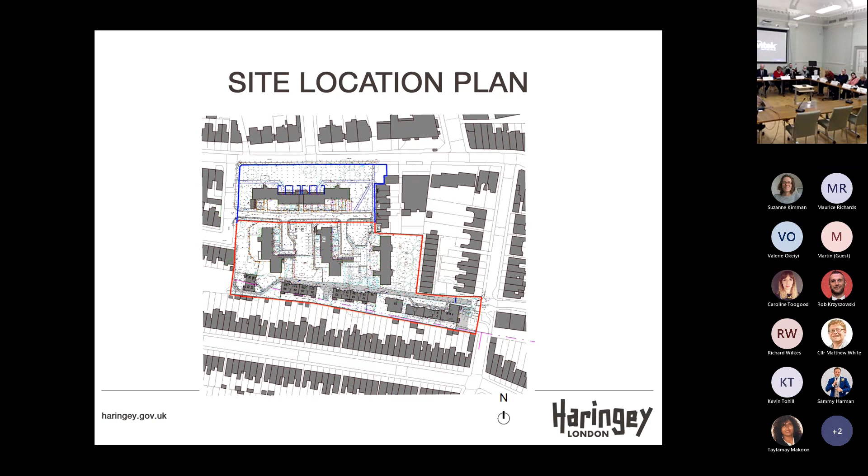This is a bird's eye view of the site. The properties formerly on Brunel Walk to the south of the site, highlighted in red, have been demolished and will be replaced by new housing.

The Turner Avenue estate to the north of Brunel Walk is set amongst landscape, communal amenity, private gardens, play space, and 2 parking courtyards. The 3 existing buildings on the Turner Avenue estate, indicated by the red line, will be retained. However, alterations to the open areas between the buildings are proposed, including improvements to access, landscape, and parking layouts. Landscape improvements are also proposed to the remaining part of the Turner Avenue estate, indicated by the blue line, but access routes will remain unchanged in this area.

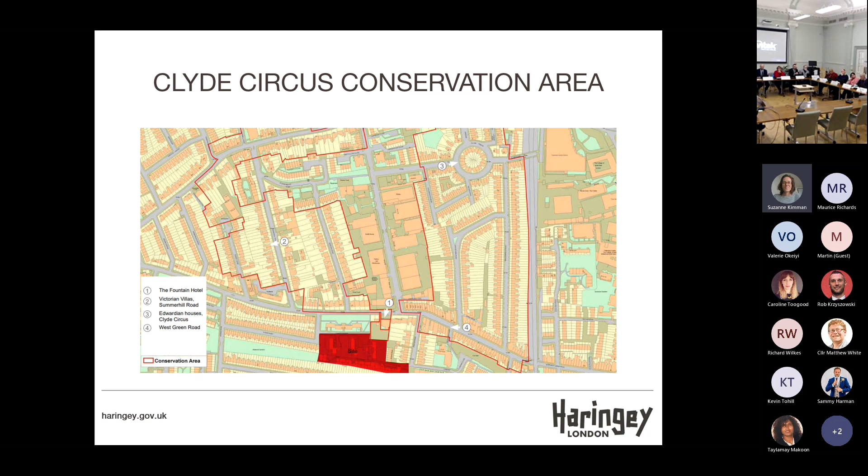The site is close to, but not within, the conservation area. The nearest conservation area is Clyde Circus, located to the north of the site, which is indicated by the red line.

The site falls within site allocation SS3, Brunel Walk and Turner Avenue, of the Tottenham Area Action Plan, which allocates the site for a potential master planned housing estate renewal opportunity to improve the quality and utility of the housing stock on the site.

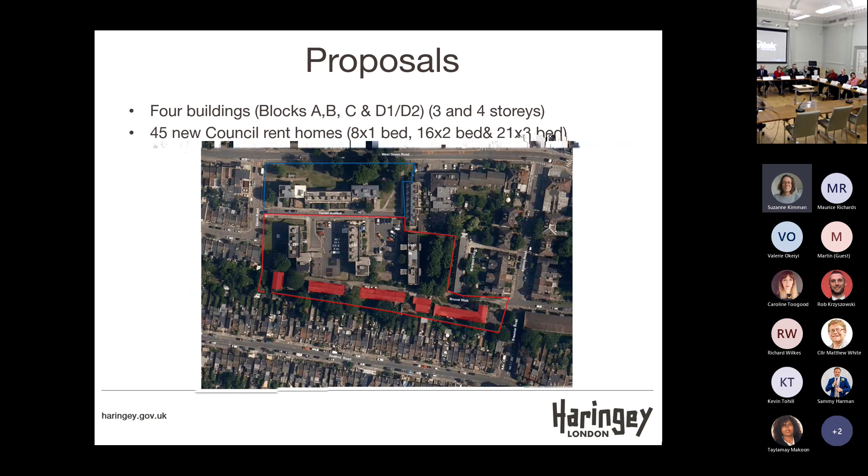The proposal includes 4 buildings, blocks A, B, C, D1, D2, 3 and 4 stories in height. 45 new council rent homes are proposed, comprising 8 1-bed, 16 2-bed, and 21 3-bed flats. The layouts of the existing parking areas are rationalised.

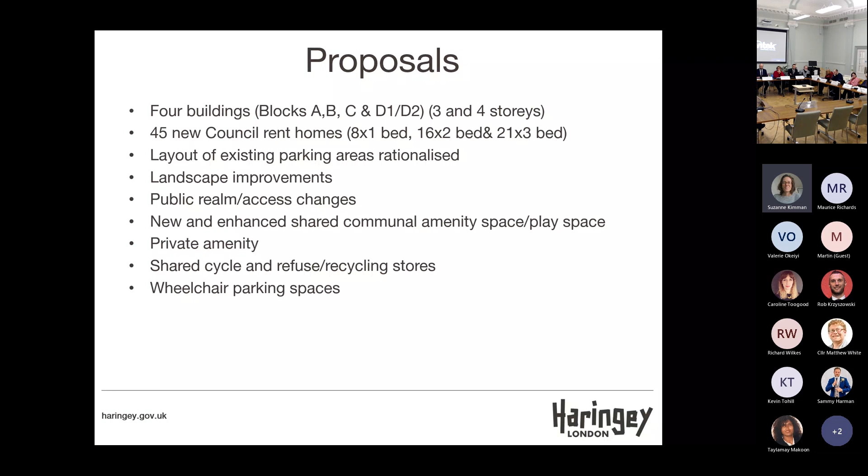The proposal includes improved landscaping, public realms and access changes, new and enhanced shared communal amenity space including play space, private amenity space, shared cycle and refuse recycling stores, and wheelchair parking spaces are also proposed.

The considerations include principle of the development, quality of accommodation, quality design, scale, setting of the conservation area, landscaping, impact on amenity, transport and sustainability. I will now focus on one of the key issues.

In terms of principle of the development, whilst the proposal does not include the comprehensive estate renewal envisaged by the site allocation, the key principle of the site allocation would be delivered through replacement of the former temporary accommodation on Brunel Walk and the proposed master plan approach to the Turner Avenue estate, which includes significant improvements in communal, parking and landscape areas. The site is being developed for council housing, which forms part of its 2018 commitment to deliver new affordable homes for rent.

The proposal at Brunel Walk will make a valuable contribution to the council's housing supply. The proposal seeks to provide 100% of the housing for general needs, low-cost rented homes, and contributes to a mixed and balanced community.

It will make a significant contribution to the delivery of the borough-wide affordable housing target, including the provision of 21 family homes, and land at Brunel Walk is a brownfield location close to sustainable transport connections in an established residential area.

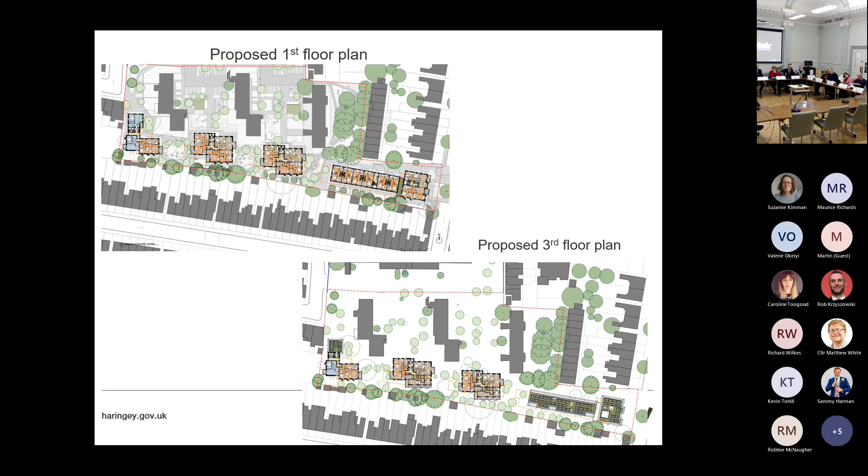Communal gardens are also proposed between the new buildings of the Brunel Walk development. A total of 65 trees will be retained and 68 new semi-mature trees will be planted.

The crowns of the trees within the existing green space to the north of block D2 will be raised to reactivate this space for amenity use. Note that each new building has a green roof.

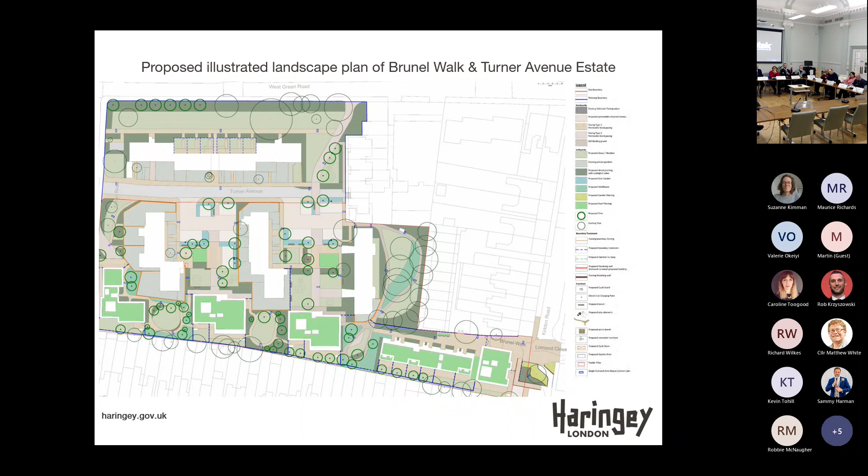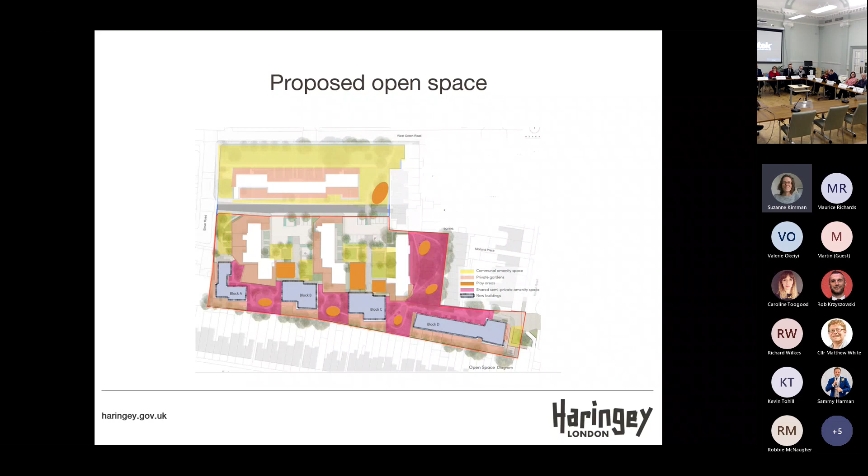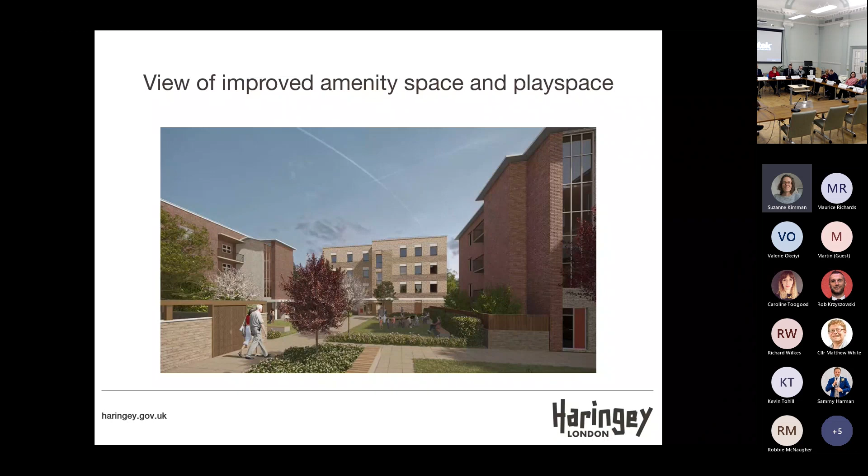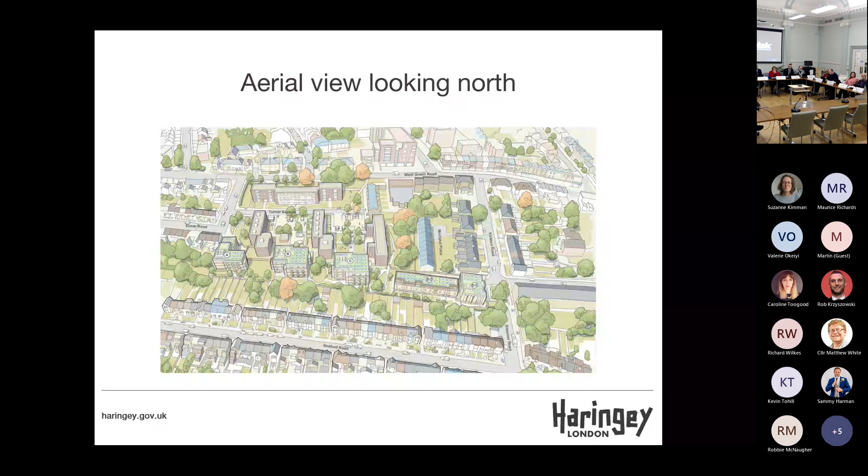This slide shows the proposed front and rear elevation. Note how buildings D1, D2 step down to 3 stories to respond to its immediate context. Buildings A, B and C have been carefully designed to respond to the existing Turner Avenue estate buildings.

The new building will be predominantly based on 2 types of bricks, with reconstituted stone details and brass coloured infill panels. The scheme has been through extensive pre-application discussions with officers, in addition to feedback from local residents and the quality review panel on 2 occasions. Note how the proposed rear elevation shows the outline of the former buildings on Brunel Walk highlighted.

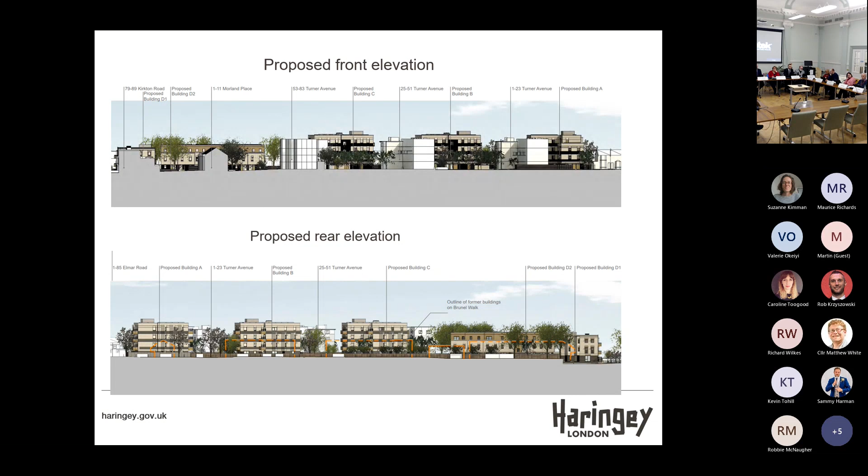This is the closer view of building D1 seen from Kirkton Road. A new active street frontage is created on Kirkton and Braemar Road. The building has more of an individual character separate to the other new buildings. Note how this building reflects the end of the terrace house on Kirkton Road.

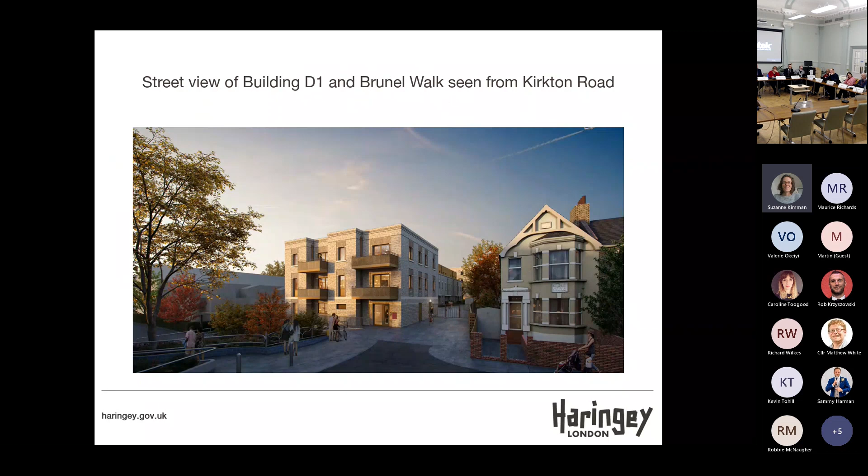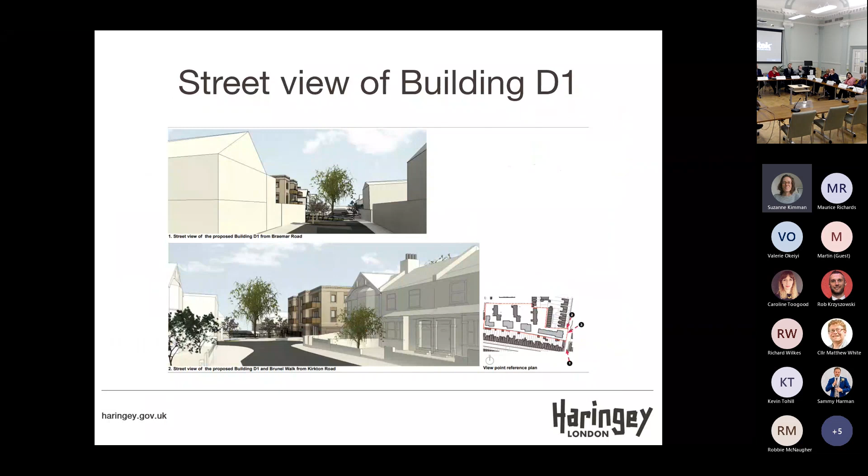This is a street view of building D1 from Braemar Road and Kirkton. This slide shows the north elevation of buildings D1 and D2. Building D2, which contains 6 maisonettes, is the newest building, with flats above.

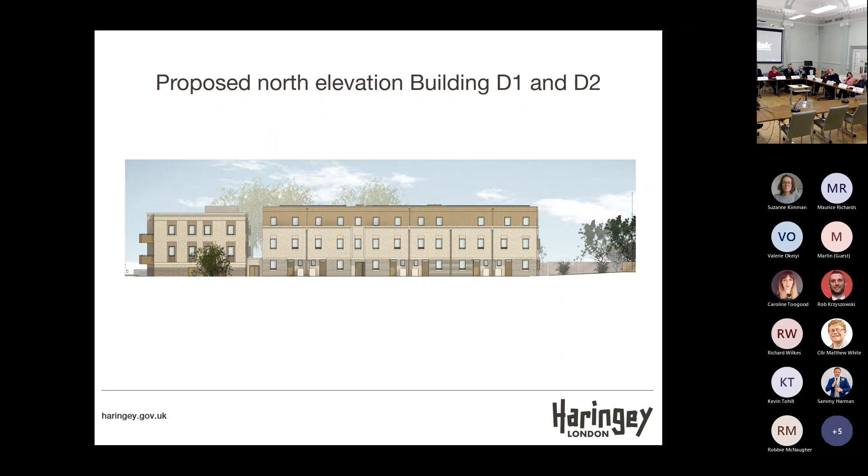This is a closer view of buildings B and C, which are identical. Note how the rear elevations facing south have painted bay windows.

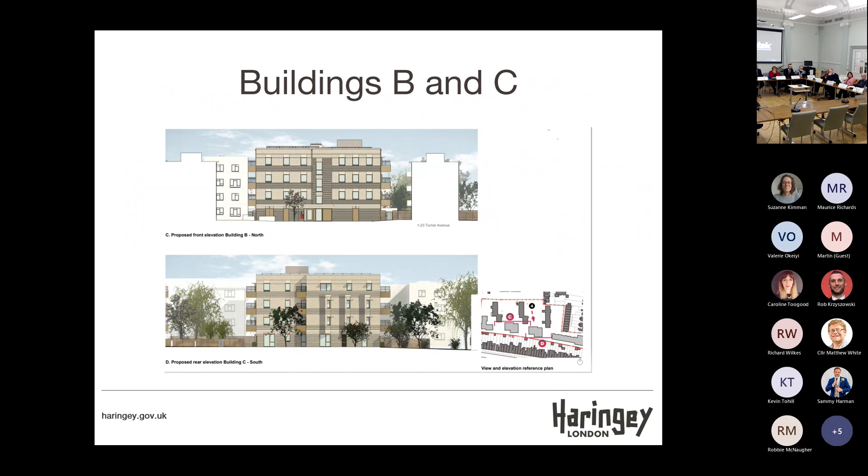This is a closer view of building A, seen from Elmar Road. A new street frontage is created on Elmar Road, and the front elevation of building A closes the corner on Elmar Road between the Victorian terrace houses and residential buildings on Turner Avenue. And the height of this building steps down to 3 stories from the street frontage.

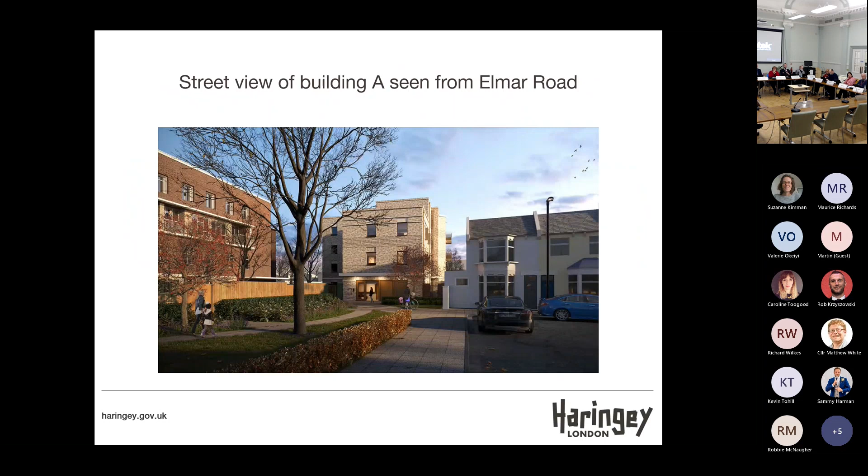Balconies are carefully positioned to face east and west and incorporate privacy screens to avoid direct overlooking of these properties, and bay windows to habitable rooms have been introduced on the rear elevation of the buildings, again to prevent direct overlooking. In addition, new and replaced trees will be planted along the rear boundary to provide some screening and further mitigate the impact on neighbours.

In terms of impact on amenity, there is no significant impact on amenity of nearby residents in regards to loss of outlook or privacy, and no significant detrimental impact on the amenity of nearby residents in regards to daylight and sunlight.

In terms of transport and parking, the site has a PTAL of 3 in Part 6A, which is a good level of accessibility. The scheme is a car-free development due to the site's public transport and accessibility levels. All 29 existing parking spaces will be retained within the parking court areas. The scheme includes 89 cycle parking spaces for the future occupants of the development.

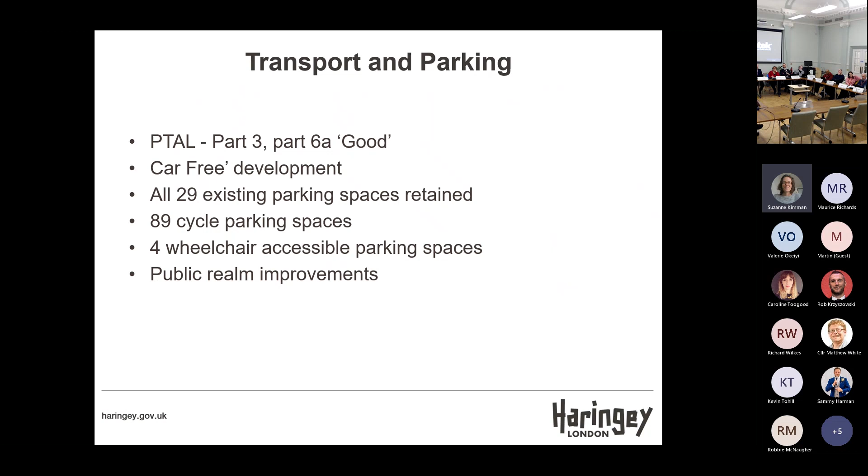This is the section 106 head of terms.

Officers recommend the committee resolves to grant planning permission subject to conditions and planning obligations as set out in the committee report.

Thank you. So, do members have any clarification questions to ask the planning officer, please?

Yeah, in the conditions, it refers to secure by design accreditation and secure by design certification. Can you tell me what the difference is between those two?

Where are you referring to? Page 19, conditions 8 and 9.

Sorry, sir, in terms of that question, the accreditation is at the start of the project, so that shows that we've been designing to meet the standards, and then certification is following a site inspection where the supervisor of secure by design checks that everything is in line with what should be. This is a certificate, so it's a sort of two-step process — signing up to those measures, showing your plans, and then confirming that at the end of the process.

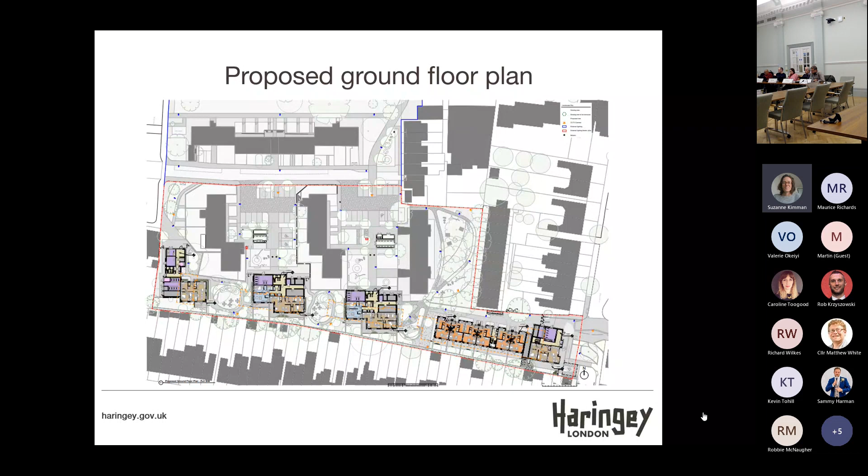Councillor Watson: Thank you, Chair. I was going to ask about this earlier, but in terms of the urban green factor, it's 0.6, which is quite high and quite good. But I want to know how that's split across the red and blue sides of the site, since a lot of the greening seems to be taking place on the blue bit. If we just look at the red bit, where the development is taking place, what would the urban green factor be for that?

The urban green factor is for the red bit. No, sorry, it's for both, combined. So it's not possible to isolate just the figure for the red bit alone.

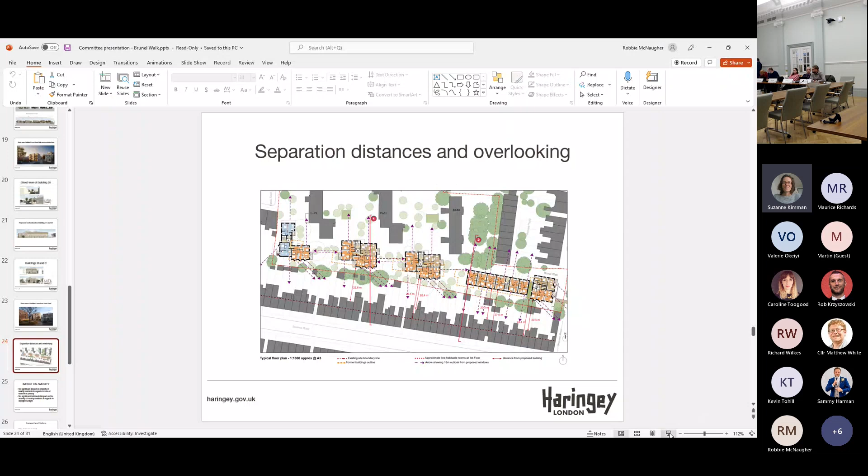Councillor Ross: You mentioned overlooking earlier — if it could go on screen please. So overlooking is dealt with by angled bay windows, introduced on the rear elevation to mitigate overlooking — angled bay windows to the new block, which are the Brunel Walk blocks to the south, and the rear elevation which faces onto the properties on... unfortunately I can't see that. Pretty cool. Anyway, we'll carry on.

If you point out on the street, those arrows show how the windows divert views at an angle away from residents. How far down is that separation? We're looking at between 20 and 27 metres separation distance. The recommended separation is 18 metres.

Is there anyone who hasn't asked a question? I'll bring Councillor Buxton back. Councillor Buxton: Sorry, just following on from that point — excuse my ignorance, but surely angling the windows just means looking into someone else's garden rather than into someone else's window?

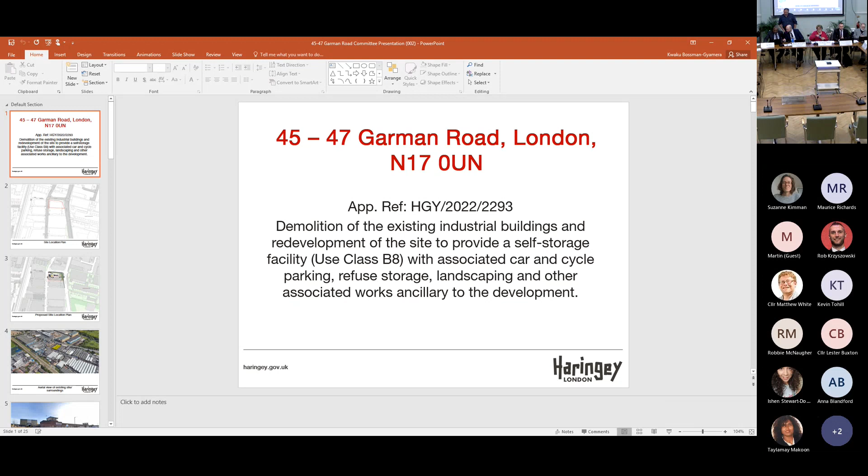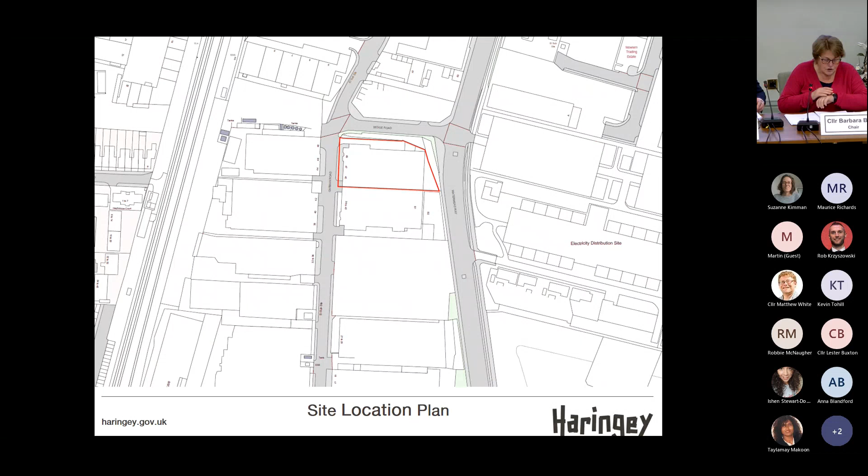Right, thank you. So we'll now move on to 45 to 47 Garman Road, which is set out in pages 149 to 242. The proposal is the redevelopment of the site to provide a self-storage facility, as set out in the pack. The recommendation is to grant, and I will hand over to Kwaku Bosman-Gyamera to introduce the application, please. Thank you, Chair.

The proposal is to demolish the existing industrial building and redevelop the site to provide a self-storage facility within use class B8, with associated car park and cycle parking, refuse storage, landscaping, and other associated works ancillary to the development.

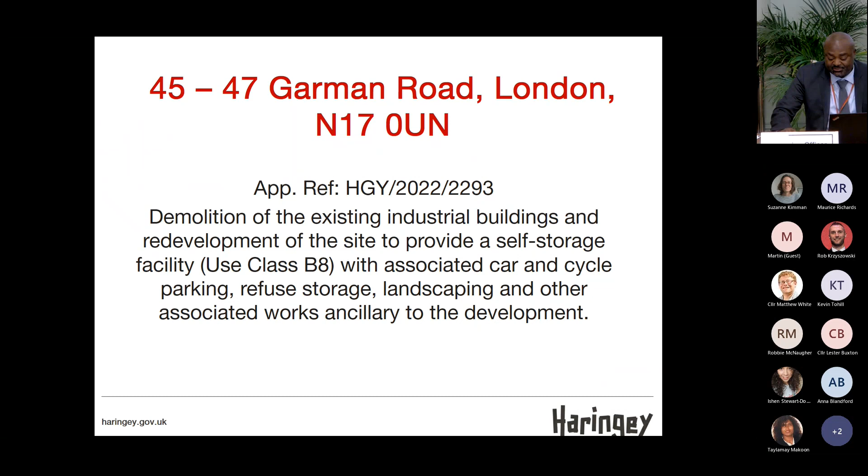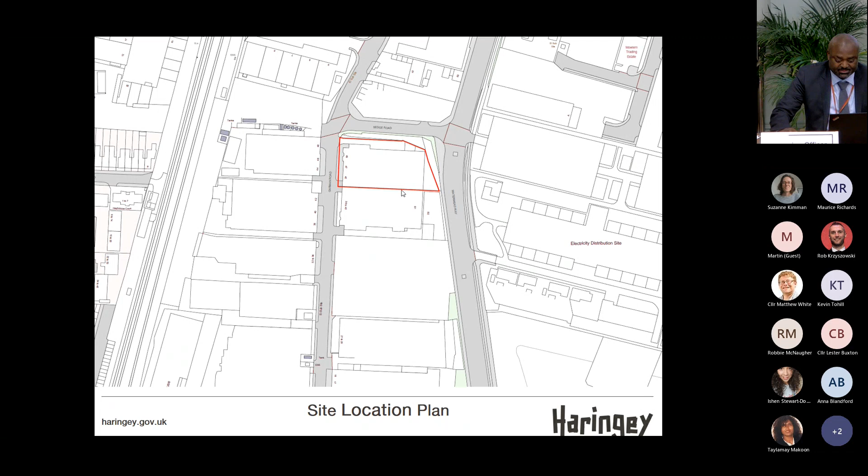The main issues for consideration are the principle of development, design and appearance, impact on amenities of adjoining occupiers, parking and highway, and of course, energy and sustainability.

On the principle of development: the site is identified as strategic industrial land, known as SIL, whose underlying aim is to safeguard the land for a range of industry users within the B classes - your B1, now the E class, B2, and B8, which is storage. The proposed development will maintain business and storage facility use on the site, which falls within B8 use, and as such accords with the objective of the designated industrial land.

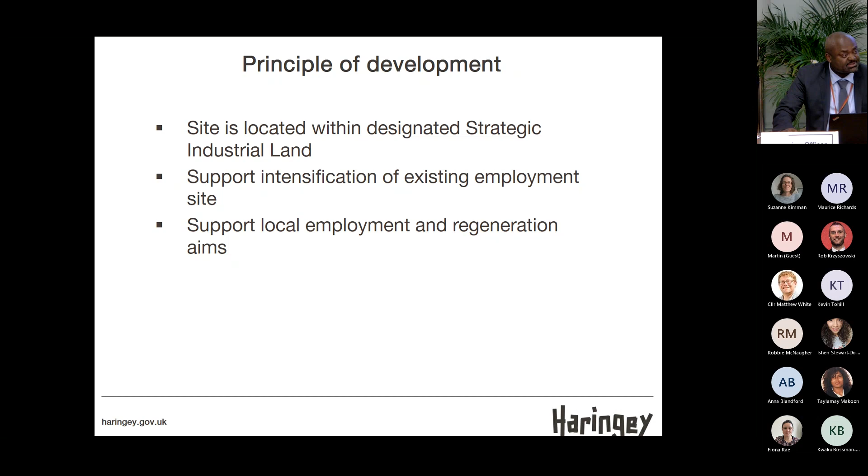The site will also enhance employment use and economic benefits, particularly in terms of providing a more intensive use and securing a modern, viable use of the site. This, I believe, will contribute to the delivery of good quality employment floor space in Haringey.

With regards to design and appearance, the proposal will replace the existing industrial unit, covering the full extent of the footprint with a new modern 3-story building. On the ground floor, the building will have access coming from off Garman Road on the side.

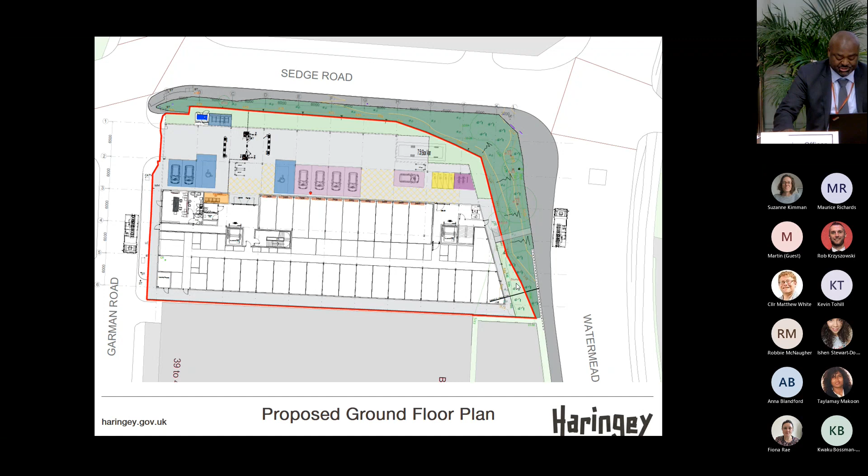On the first floor, the self-storage floors are located on the first and second floor, continuation of the staircase and the lift from the ground upwards.

This is infilled with a demountable mezzanine on the third floor, so this can easily be moved and changed around.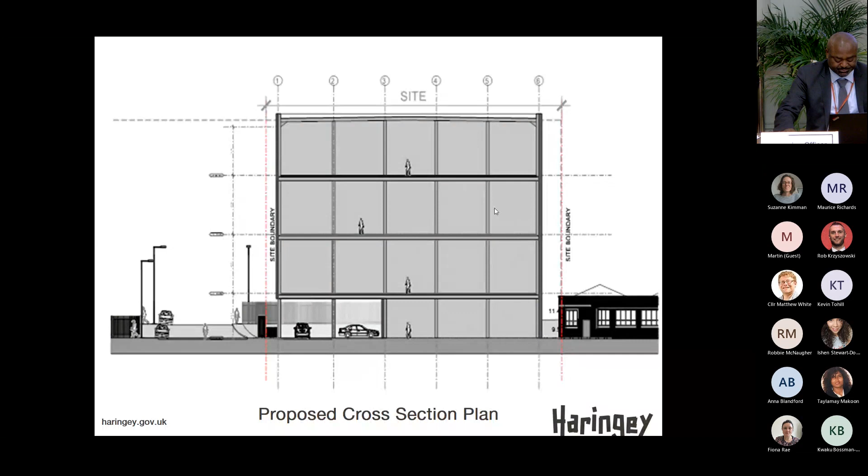The design of the building itself, we've got the section which shows the cross section of the building. We've got the undercroft or the overhang on the first floor with the storage units on the upper floors, and of course the proposed roof with extensive green roof above, with solar PVs on there.

With regards to the design itself, the design of the building has been achieved through a pre-application discussion with officers, and the plans have been amended to reflect our design officer's comments. Although the adjoining properties are mainly 1-2 stories high, the design of the building responds to the existing and emerging context of the immediate and wider surroundings.

The proposed building, in terms of height, is almost similar to the power station across on Watermead Way.

The emerging context of the site - we've got our site, which is outlined in pink here, and in the surrounding areas, in terms of the emerging buildings, you've got the new development on Watermead Way, or Meridian Water, which are almost - the first phase, I believe, is 54 meters high, the second phase 45, and the third phase - so we're looking at very high, tall buildings.

Adjacent to that, across on the other side, you've got the IKEA and the Tesco site, which are also for consideration for much higher development.

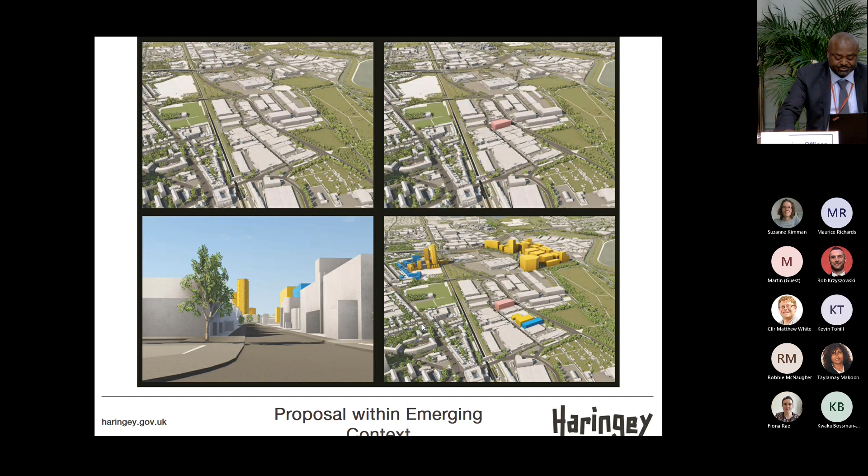With regard to materials, it will be of a steel frame with steel cladding to reflect a more modern warehousing in the surrounding area. A condition has been imposed to make sure that we secure a good quality material for the external appearance.

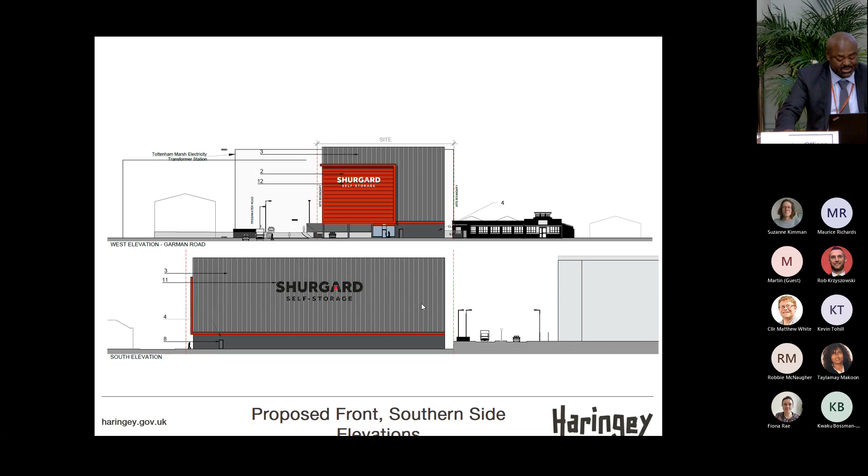You're looking almost 250 meters from the site. So as such, the proposal, given the significant distance of the nearest residential properties from the site, it is not anticipated that the proposal will cause any significant harm to adjoining neighbors or even within the wider area. And of course, the surrounding area, immediately surrounding, are all industrial units.

And also, given the low nature of use of this development, which is mainly very low key, I don't anticipate there will be any issues at all in terms of harm to the neighbors.

I'll then move on to parking.

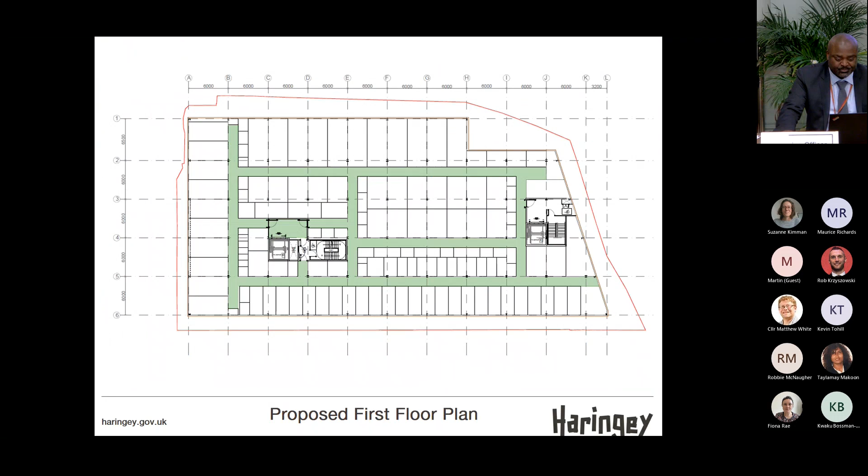With regard to parking, the existing access off Garman Road will be retained. There will be a gate arrangement within the site, which will provide a secure area within which there are 6 car parking spaces plus a bay for a van.

There will also be a 3-bay for visitors in between the access gates and the entrance, along with visitor parking, which is where you've got the 6 here. And 2 of the parking bays will have EVCP bays with active charging facilities.

There is secure cycle parking, 10 short stay plus 10 long stay, and this meets the London Plan requirement. In terms of number of delivery and service trips, this will be very low given the low-key nature of the scheme. We don't anticipate there will be a huge number of deliveries and services along there.

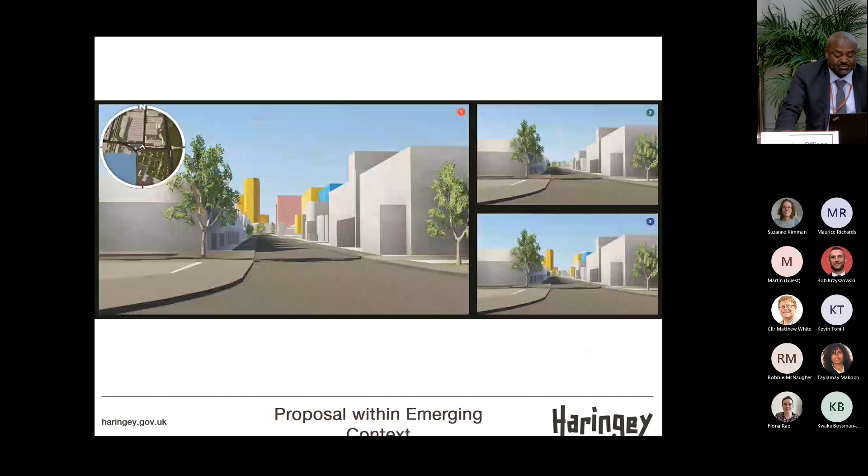Extensive green coverage and landscaping goes some way towards meeting the urban greening policy of the London Plan.

Although there's a shortfall in some of the information on heating and system management, particularly regarding the costs, the officer is happy that the conditions imposed will be able to overcome those issues. A number of conditions have been imposed in the application.

We've also sought a carbon offset contribution as well, and all of this has been set out in the heads of terms and the conditions. We don't anticipate any impact at all on drainage, and as such the officer has suggested some conditions with drainage, which have been imposed.

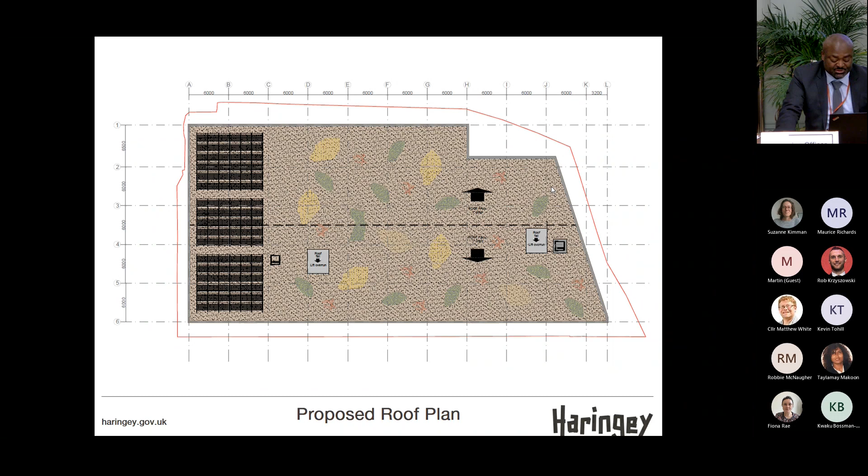With air quality and contamination, officers are satisfied with all the measures that have been submitted, and they've suggested conditions which will be imposed to mitigate any potential contaminants on the site.

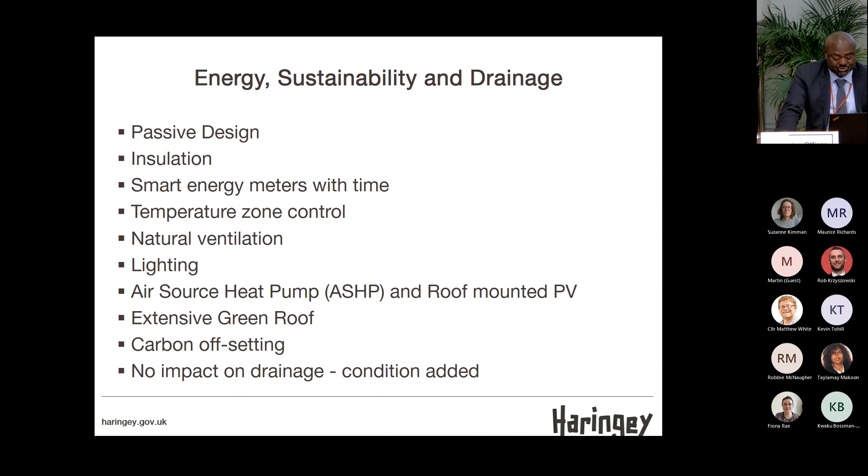With proposed waste collection, the site proposes waste storage within the ground floor, and in the travel plan they give us the collection arrangements, which we will control with a condition just to make sure they meet the current standards.

With waste management for commercial properties, it's not something the local authority controls, it's all private, but we will impose conditions to make sure the arrangement is satisfactory and meets modern standards.

Overall, the scheme strikes quite a good balance between the aspiration of the applicant to have a self-storage facility in this borough with minimum impact on the surrounding area, and in meeting the underlying objectives of the strategic industrial land.

I would therefore urge members to support this scheme broadly, which broadly meets council adopted policy and the London Plan, subject to the heads of terms and the conditions.

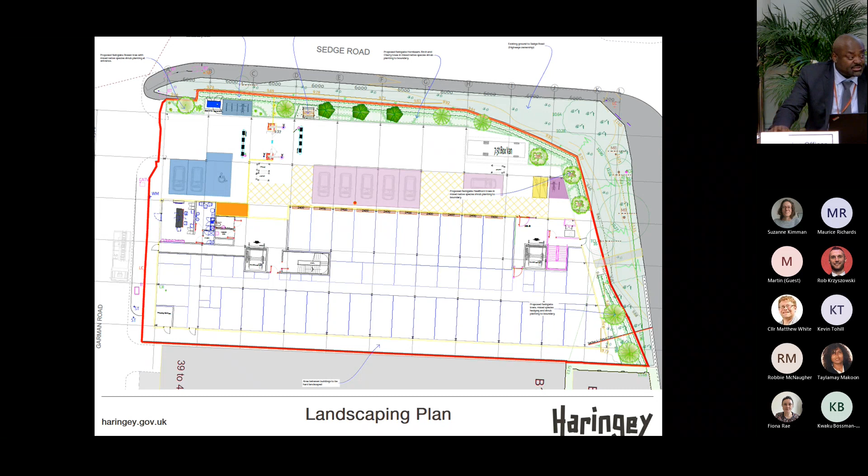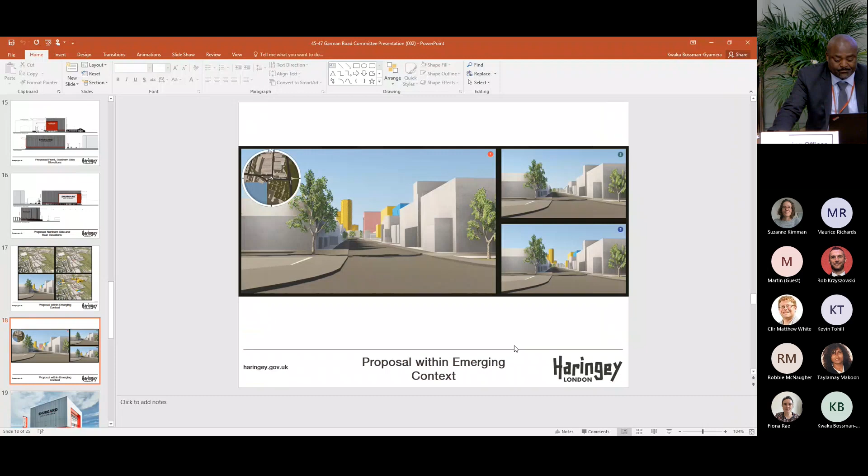Thank you, Chair. Thank you, Kwaku. Right, so do members have any clarification questions? Councillor Dunstall.

The site is sort of bigger than the immediate vicinity in that industrial space. And that industrial space is also quite dated, and I would anticipate further development, perhaps.

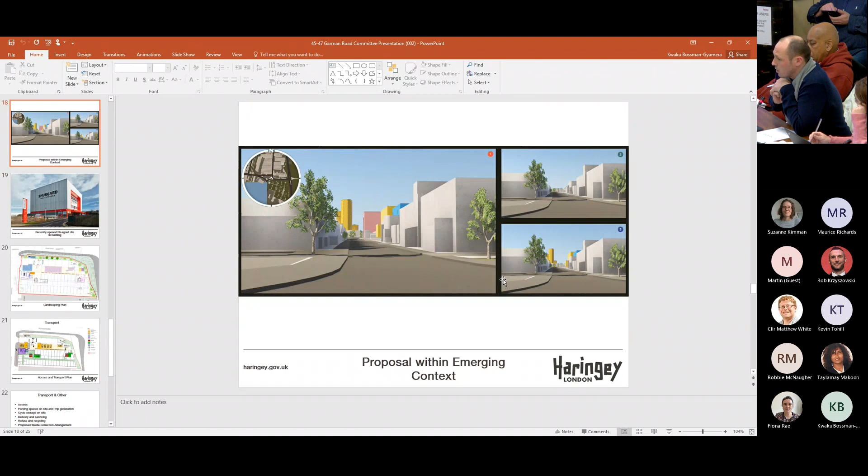4 stories does still seem quite high. I do accept that it's 250 metres from residential properties, and we've got the electrical substation over there, but it does strike me as being quite high. I just wondered whether there's any thoughts on how low rise the rest of it is. From my memory and from the pictures, they are sort of 1 to 2 story light industrial residential units, and this is a big proposal.

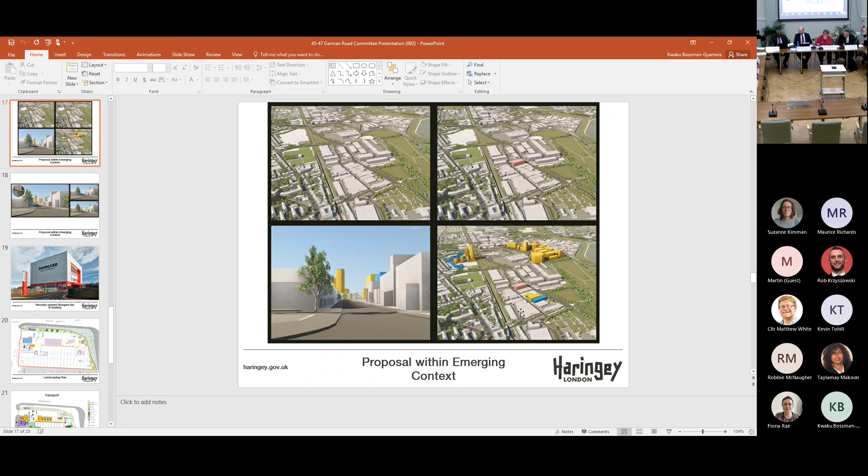Immediate surrounding, you've got mainly 1 or 2 story buildings on site. However, to the south of the site, we've actually approved 2 yellow and blue colored buildings, which are almost of a comparable height to the proposed. So the proposal in terms of height would not detract from the immediate property, given the emergent context of what is basically going to be built.

Across the road, which is a couple of meters away, you've also got the high power station. And of course, to the north of the site, Meridian Water, you've also got a huge development taking place. So immediate context and the wider context, I think it will not detract at all from the site.

Thank you, Chair. Just 2 questions. I'm aware that this area has a Japanese knotweed issue, and having checked the conditions and informatives, I couldn't see any points with regards to the Japanese knotweed. So I just wanted to find out whether we can add a condition or informative about prior to development, whether an investigation can be undertaken and a treatment plan implemented should there be Japanese knotweed identified.

And the second point is in relation to the section 278 highway works agreement. I know that the paving around that area is not in a good state, so I just wanted to get clarification that that will also entail improving the pavement.

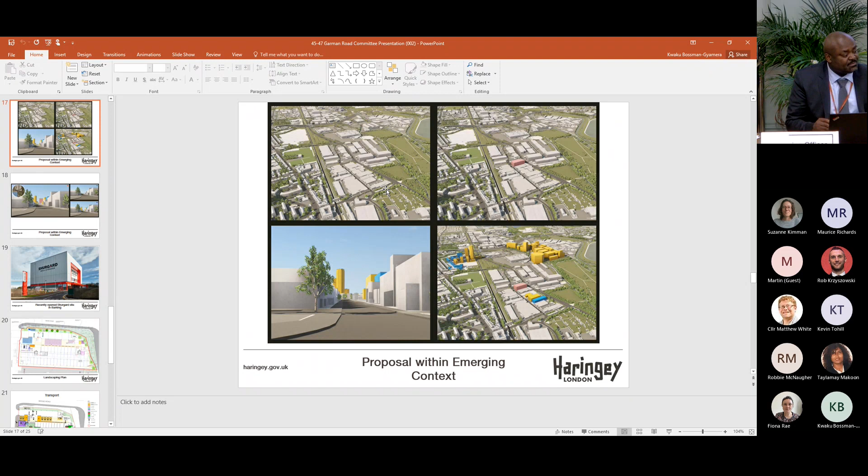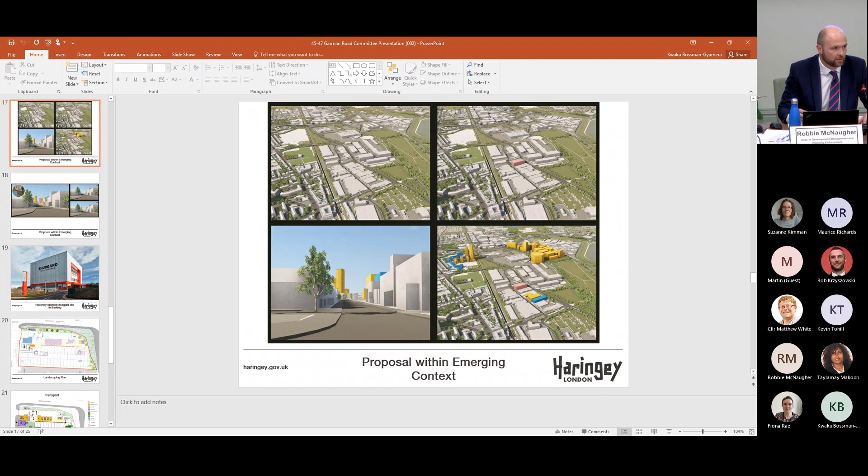Yes, I think it would be appropriate just to clarify in the wording that the 278 works should include that pavement improvement, having seen the state of that on site, and I think that's an acceptable mitigation for the development, bringing additional footfall into this area.

Councillor Bevan. Yeah, just to say about the design, which you said was utilitarian, so I'm taking your word that although it is like that, it won't sort of be a prison type looking development.

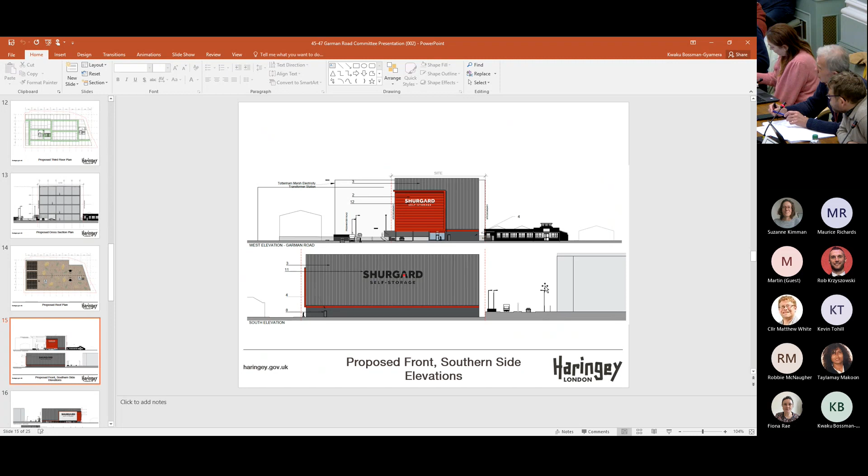But can I ask about the fences? Are there going to be any fences? Because I'm really concerned about these developments having fencing around that makes the whole area look like a prison. So that's my first point.

The second point is what Councillor Erbat just said. There's no condition in here about money for resurfacing the roads and the pavements, which are actually in an appalling state. There's no condition at all, there's nothing here. And the Japanese knotweed stuff, there should be a condition, not an informative, because it's really rampant around there. So I would like to support what my fellow councillor says about a condition for Japanese knotweed and the state of the pavements and roads, which are appalling around that whole site.

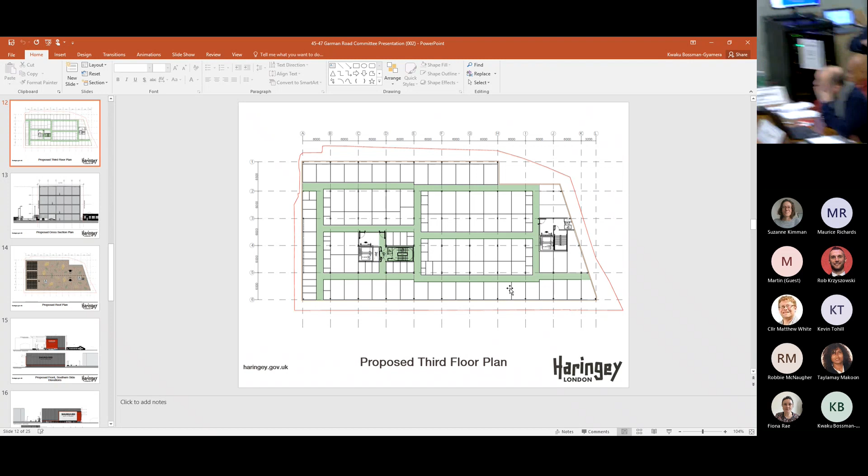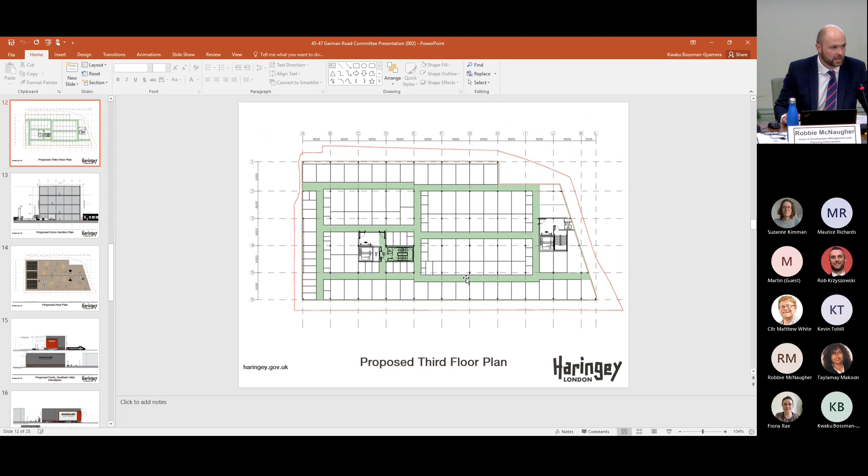Fencing? There is no actual physical fencing. The fencing mainly will be by the landscaping, but just getting into the site, you've got a bit of a gate, an access gate that will let you up into the site. But the fencing around the site, none at all. It just done will be by way of landscaping all around the site.

And Councillor, just to add, condition 3 covers fencing, so should the applicant wish to put any up, we will have control over the detail of that.

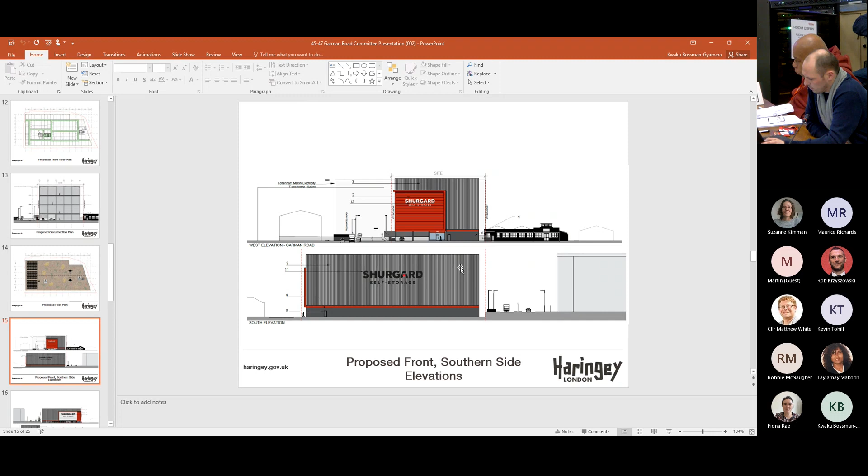Councillor Rice. Thank you. First, I must say that I'm quite pleased to see this proposal come to committee. Over the last 10 years or so, various proposals for development has always been housing around Ashley Road and so on, there were like industrial units around there. That's all gone to housing. So I'm pleased to find that some developers thought the way through the problem and began to supply work units where people can get employment.

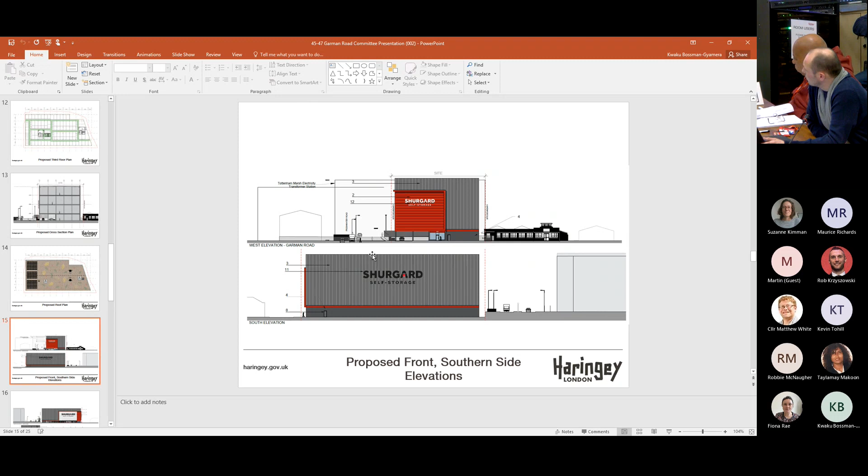Just one point, I'm not sure what material that building is made of. And someone earlier on the committee talked about the state of gardens and landscaping. But if you're going to put landscaping on this industrial site, miles away from anyone else, who's going to look after it? No one's going to take a blind notice of it. Once it starts to take hold, it just runs to ruin.

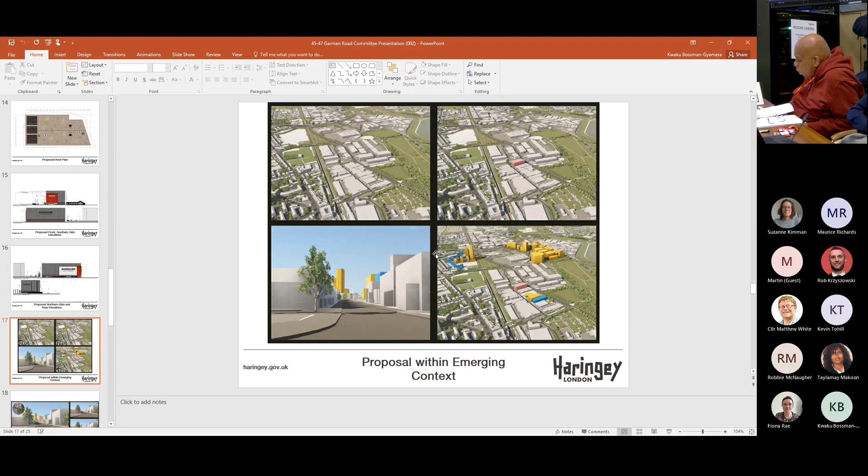But that said, I'm just pleased that this development has come to committee so that we begin to build an industrial base to what little industrial we have in Haringey.

The materials will be similar to what has been done on the side of the estate, but we will control that with a condition to make sure good quality material is used. Then there's the similar one in Barking, and we can possibly also control the color as well, which will all come through as part of the approval.

How high is the scheme? It's about roughly 23 meters high from the ground. I think these sort of schemes are almost the same height all over London. The one in Purley is a similar height. Barking is 21, 22 meters, almost similar height throughout. With self-storage, you always need a floor to ceiling height, so that's why you need them to be that high.

I've got Councillor Worrell who wants to come in.

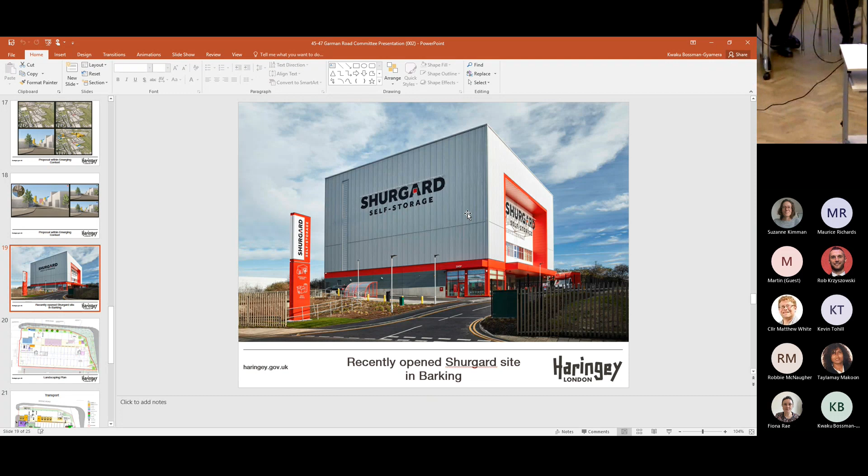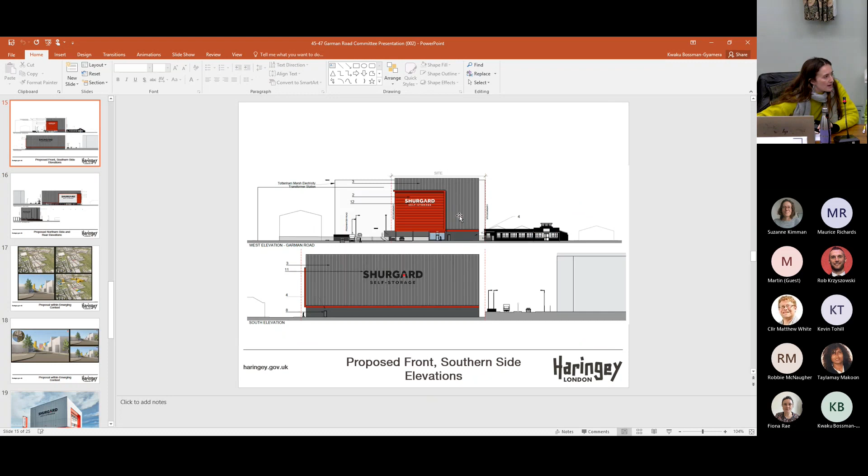Thank you, Chair. It was just a point of clarification about the urban greening factor, because I note that because of the use class, it's not actually required to meet the 0.3 target. But there is some detail about the greening that's going to be done. Later in the document, it says that as a condition, it will need to show that it's met the 0.3 target in construction. So I was wondering, would it not make sense to set out now whether the proposals put forward do meet the 0.3 target? What's the benefit of requiring that at a later stage?

Thank you, Councillor. I'll let Sue tackle that particular aspect. So your question is whether it's useful to be conditioning this, essentially. Good question. I think there is still benefit, because as we've seen tonight, landscaping schemes are often subject to further design after permission is granted. In this case, the urban greening factor statement can inform that, and I think it would be very helpful in this instance to do so.

Does that help? Thanks. Okay, so Councillor Corley-Harrison, then we've got Councillor Bevan.

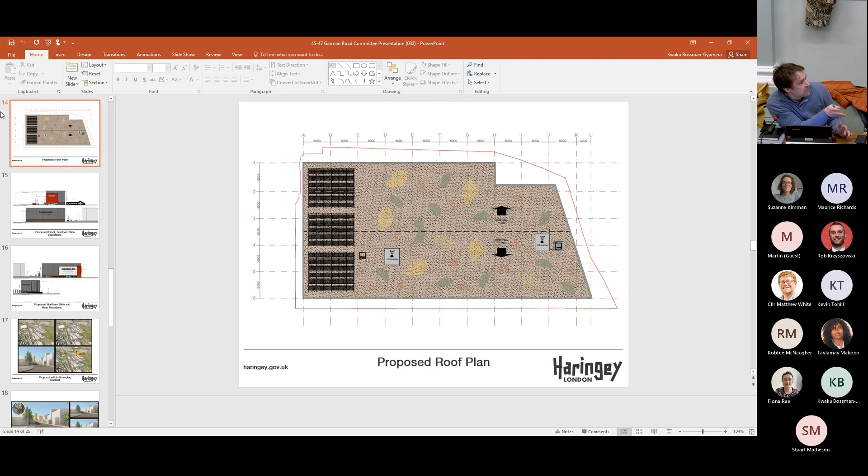My first question is literally the opposite to George's question, in that four stories seems, even though they're commercial stories, small to me. So I'm wondering, is there not a wider area action plan for the area encouraging development in what is an area principally good for large scale development? Do we not have minimum levels we want to achieve? My second question relates to staff parking. I get the impression that the six spaces are predominantly for customers, so I'm wondering what the staffing levels will be on site and where the proposed parking is for those staff, given the PTAL rating.

Thank you, Chair. Typically, the staffing for these sorts of storage facilities is between 3 and 4 full-time people, so potentially it's a very low number of staff. In relation to the tall building aspect, we've got designated areas within the borough where we normally prefer tall buildings to go. This particular site doesn't fall within that area, but given the emerging site to the north and the other side, in context, I think it's quite an acceptable way to treat the site.

So on my first question, well, it was the second question, where will they park? We've got 6 parking spaces. I think I'll get Maurice to address that.

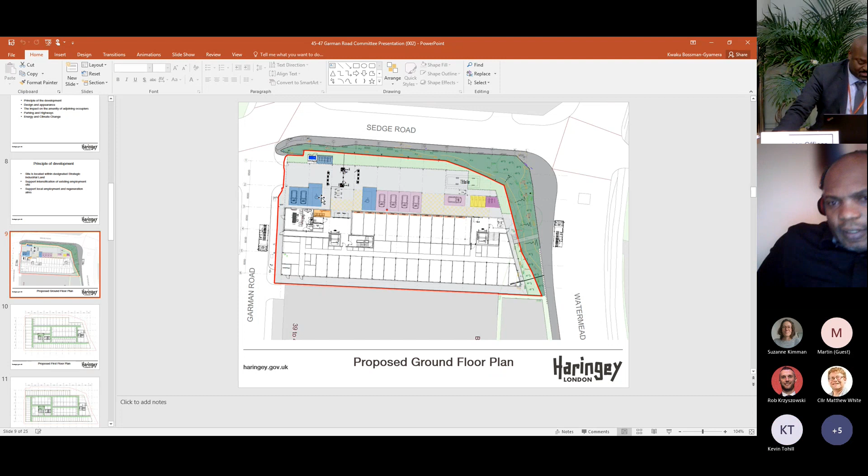Good evening, Chair, I hope you can all hear me. There's parking provided within the development proposal for the employees, but as Kwaku said, for a development of this nature where it's self-storage, it's very low trip generation in terms of staff. So there's sufficient parking provided for both people coming to drop off and for staff.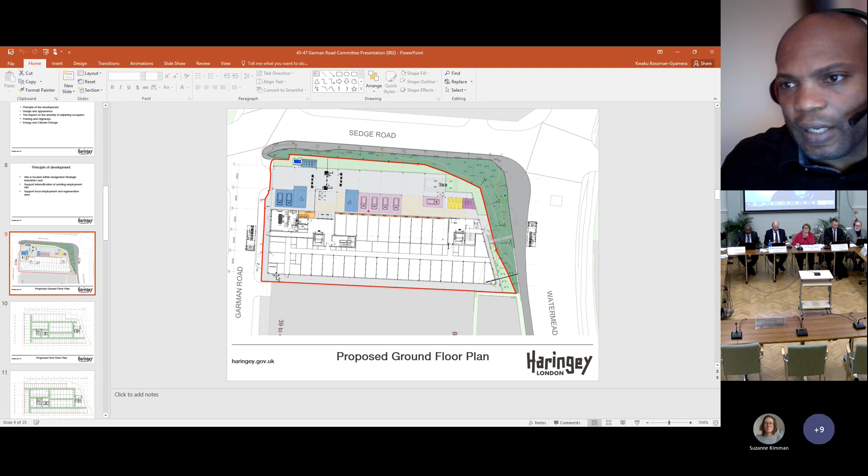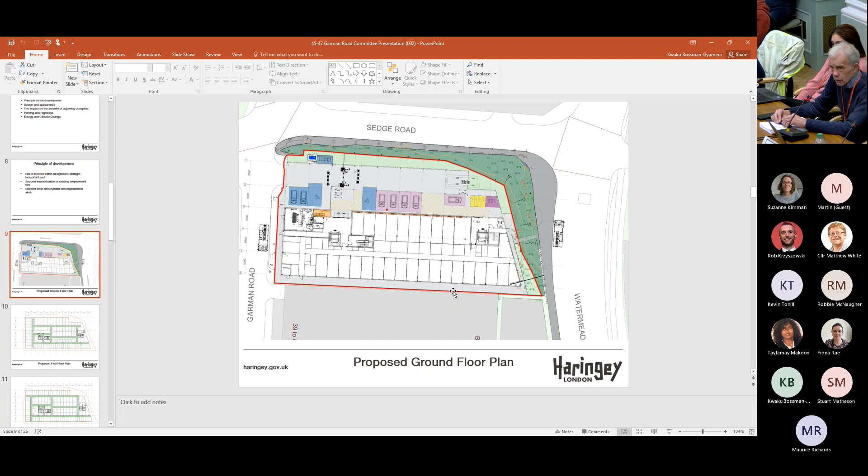Councillor Bevan: I think because demand for these units is huge, all the adjacent buildings will eventually be knocked down and replaced with higher developments. But an issue that's come up with this road is the extra sized units and articulated lorries driving up and down. There was a request a while ago from occupiers of that road that it be made one way, because big articulated lorries can get stuck and can't get past, and there's parking as well. Maurice, could we deal with that issue with this application and make Garman Road one way?

I think the short answer to that one is no, Chair. We'd have to do it as part of a larger scheme in consultation with other businesses. Also, this section of Garman Road is kind of a dead end, so there's a turning head at the bottom, so you couldn't make it one way on this section. Probably the top section, where it cuts back to Watermead Way, you could do, but this section would definitely have to stay two-way. I'd have to look at that as part of a larger scheme, not in isolation.

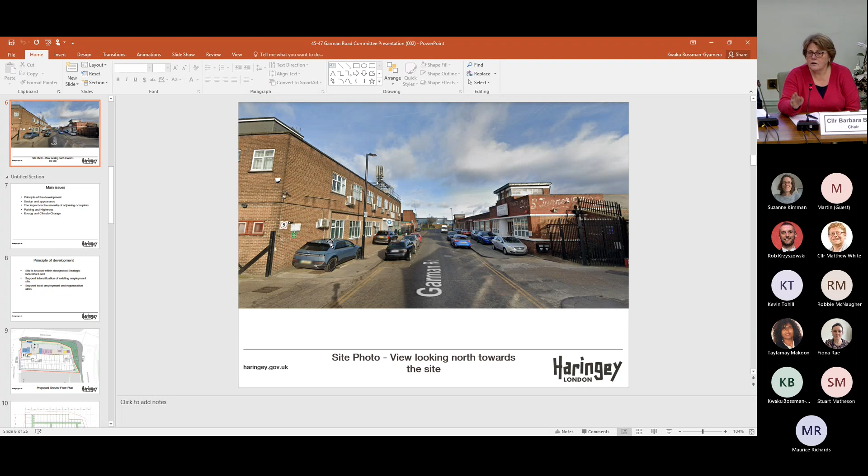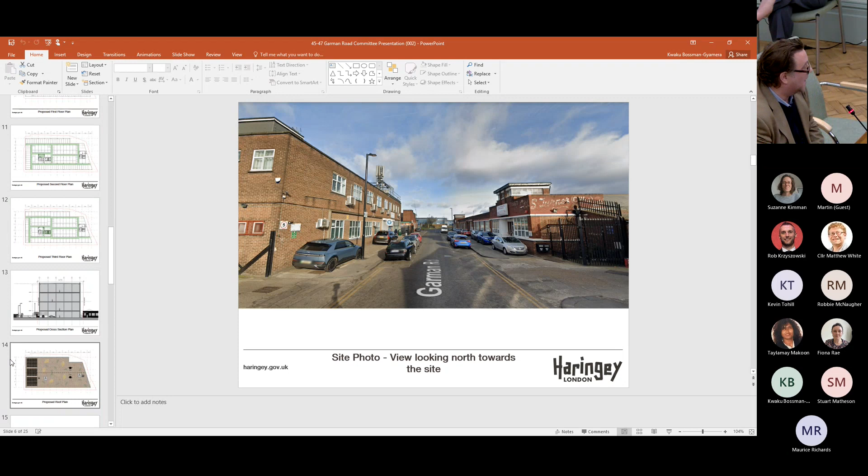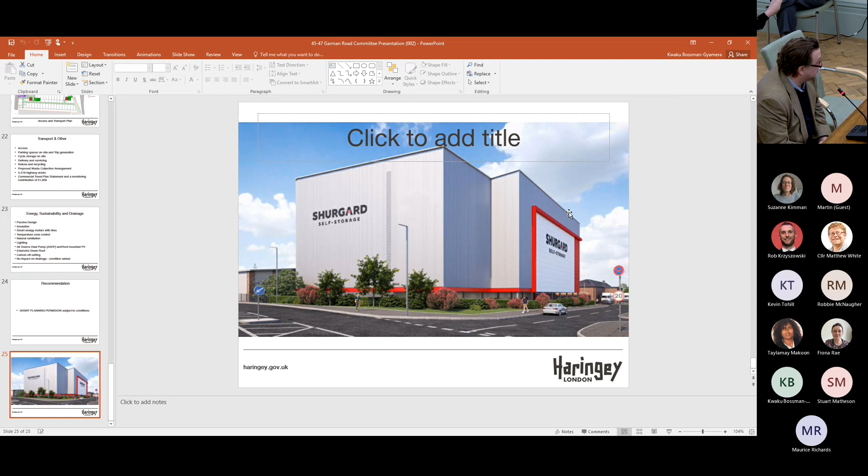Hi, my name's Richard Byatt, I am the development manager in the UK for Shurgard. In terms of parking, we have very limited travel numbers anyway, probably 3 to 4 vehicle movements an hour in and out of the site. With regards to our staff, we encourage them to use public transport and to cycle. There's probably only going to be one car parking space at most taken up by our staff during any period of the day, so there is ample parking on the site for both staff and customers.

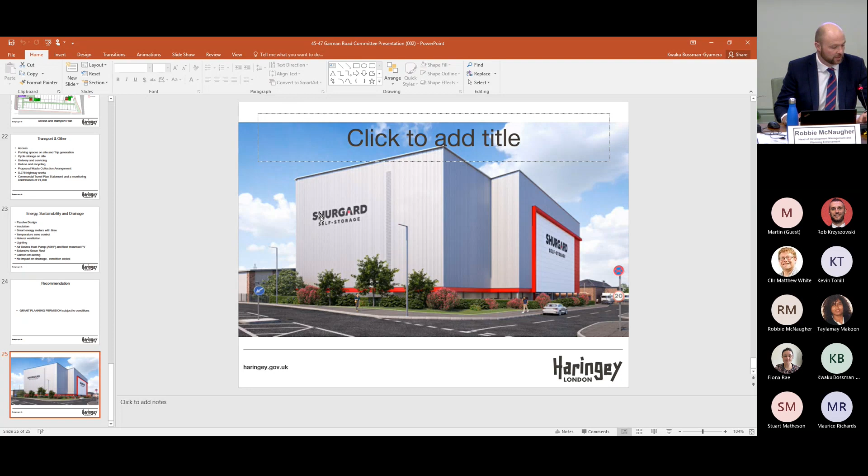Okay, so there are no other questions, we'll move to the recommendation. I'd like to ask Robbie McNaugher to confirm the recommendation with a summary of any changes. Thank you, Chair. Two points will be added to the recommendation: an amendment to the condition on the Section 278 agreement to ensure it includes improvements to the surrounding pavement, and an additional informative in relation to the applicant's obligations under Japanese knotweed. Otherwise it's as set out in the report and the addendum, recommendation to approve subject to Section 106.

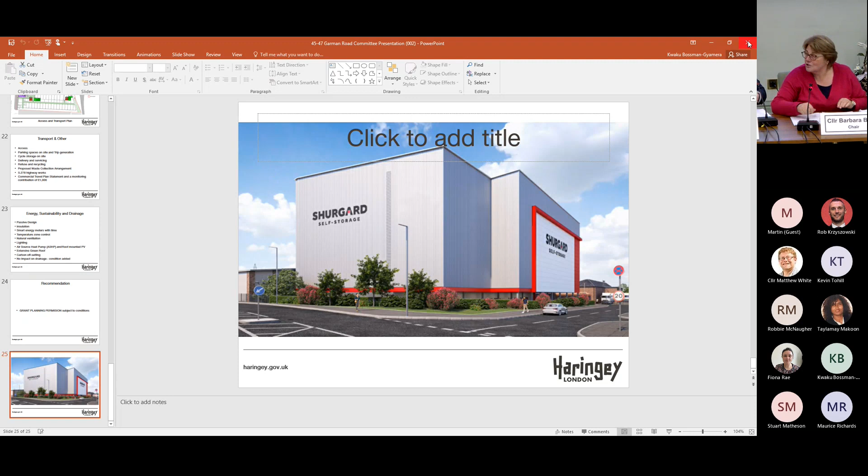Right, okay, so moving on. We've got an update on major proposals, pages 243 to 260. This is to note, can you direct any questions to Robbie McNaugher? Are there any questions? No, okay.

So item 11, applications, there are questions. Councillor Bevan: Can I just ask about the almshouses in Edmonton Close? This has been on the agenda for years, what's actually happening? It has been a long pre-application process on this one, but that is now a live planning application and went out to consultation just before Christmas, so we're just considering that at the moment. Okay, thank you.